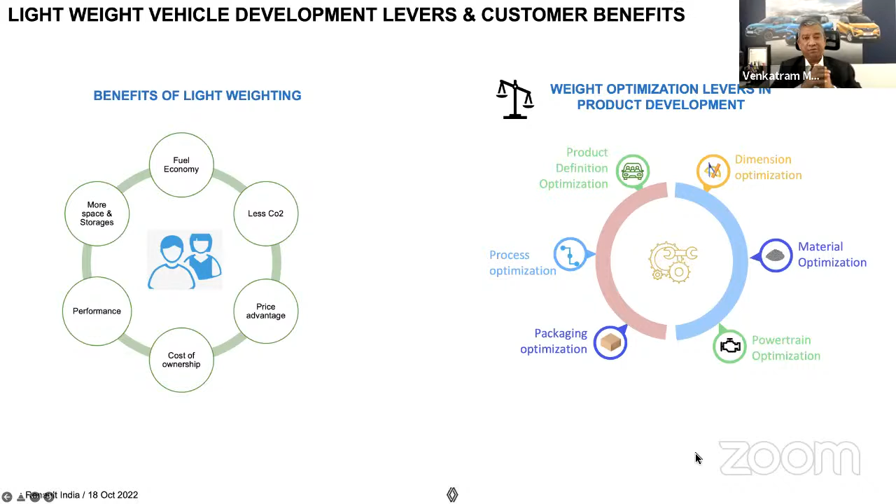I'm just talking about the Kwid as an example, being Renault. Kwid is our product, so I want to put some perspective to this.

Less weight for its size. At the time we launched the Kwid, if you look at the overall length of the car versus the weight across the market, Kwid was the best. This proves that less weight doesn't compromise on size — it definitely gets you size even with lesser weight. How we achieve this lesser weight is something we'll elaborate on further.

Fuel efficiency is very critical. In India, we know our fuel prices, the way they fluctuate and are always on the higher side. Lesser weight means smaller engines, better engine efficiency, and more fuel economy.

If you look at the competition, which we've narrated as C1, C2, C3 — I didn't want to put the names — with respect to them, the Kwid, being lightweight and having very high fuel efficiency, is shown in the second box on the right.

And more exterior volume with less weight. As we spoke about a few minutes back, less weight can give you more space because you don't occupy large spaces, and you can economize on the volume available in the car. That's the second point we're trying to establish.

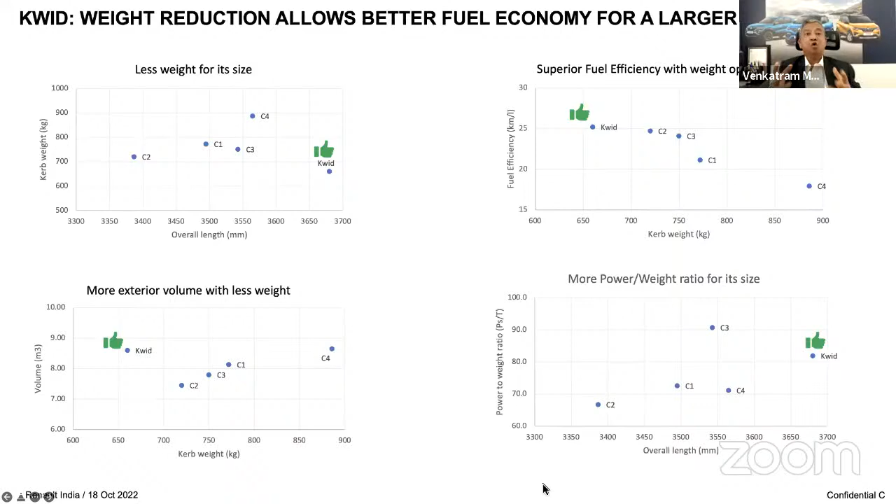These are a few examples which reflect a global trend. It's not specific to the Kwid, though it's being adapted in Renault globally. There's one good example from an older model we used to make.

We had the body upper structure at 134 kilos, and we got it down to 89 kilos using various types of steel. We started off with tailor welded blanks, using different thicknesses of metal, welding them, blanking and shaping them, then moving to advanced high tensile and ultra high tensile steels, which are now easily available in the marketplace. We also used aluminum sheets and magnesium material. For example, the twin steering wheel has magnesium inside, reducing weight and increasing efficiency, as well as cast aluminum, which is a trend most of us are using, followed by plastics. There are various types of plastics, whether fiber reinforced plastics, sheet molded compounds, or thermoplastics, also being used. So the change from 134 kilos to 89 kilos on the upper structure is a significant improvement, which adds to vehicle performance and drastically reduces loading on the engine.

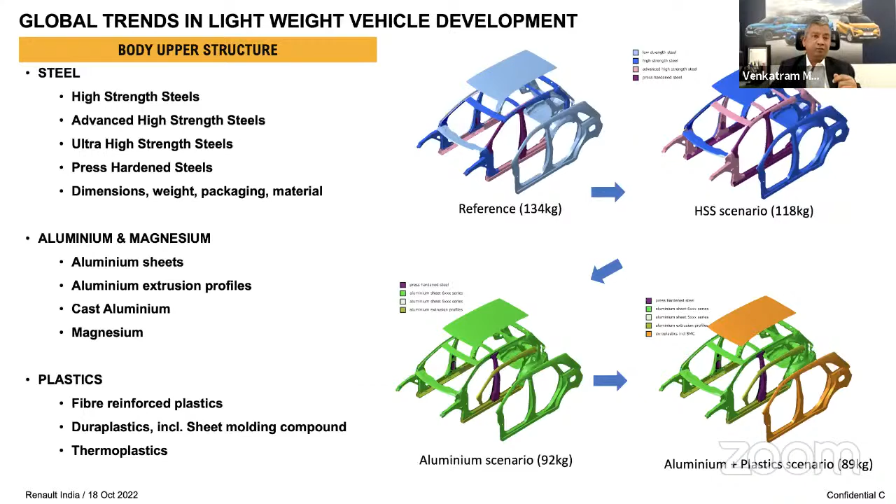Can we go to the next slide? This is the opening panels, on the side body outer as well as the doors. Similarly, from 111 kilos we went to 61 kilos, almost 50%. This is not that easy, because it has to take the side crashes, it has to have the safety, as well as reduce weight. These are the exercises we've done. Again, we're talking about steel, aluminum, plastics being added to it. In some cases, we also used perforated steel for making the side inners or body inners or door inners, so that we can reduce weight and still keep the strength of the metal as is. So these are a few examples.

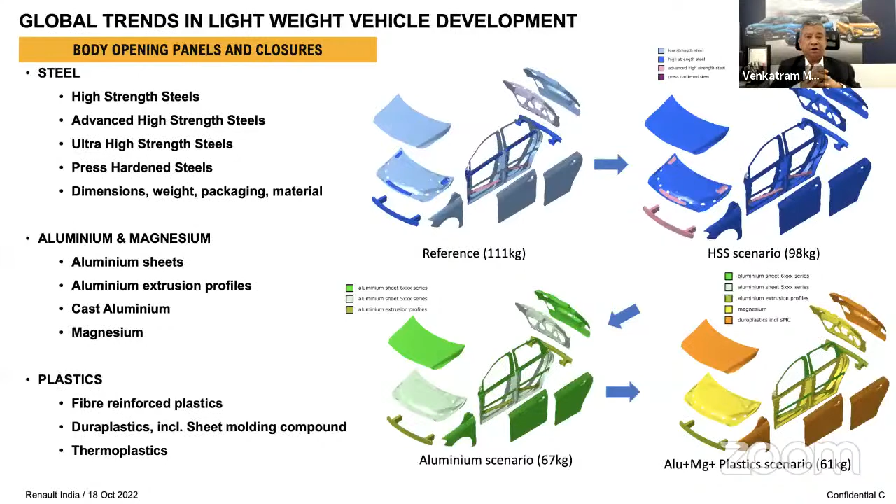As we move ahead, I'll also talk about the interiors. I'm not sure if you've read in many newspaper articles. Can we go to the next slide, please? People are using natural products, natural material, whether it's coir or banana leaves and so on and so forth. Here are some examples where we are also trying to do this on insulations. Especially on insulation, we are using cardboard, not the normal cardboard, or high absorbent polyurethane, as well as light non-woven carpets for the underfloor, which also helps us significantly with NVH. And the parcel shelf, which goes behind the seat, is also made using natural fabrics or natural material, and this is giving us significant results.

Definitely, we will have weight reduction. There is a little bit of cost associated with this, but overall we are trying to balance between weight and cost. Lightweight doesn't mean that it is expensive. This is one more paradigm which we all have to understand and shift from, that lightweight also gets us cost benefits. In the initial stages, when we were nascent in the automotive industry, lightweight was expensive because people were switching to aluminum. But now, as we progress, there's a lot of new material coming up which is very natural and not very expensive. It doesn't mean they are cheap, but they are cost competitive, in my opinion.

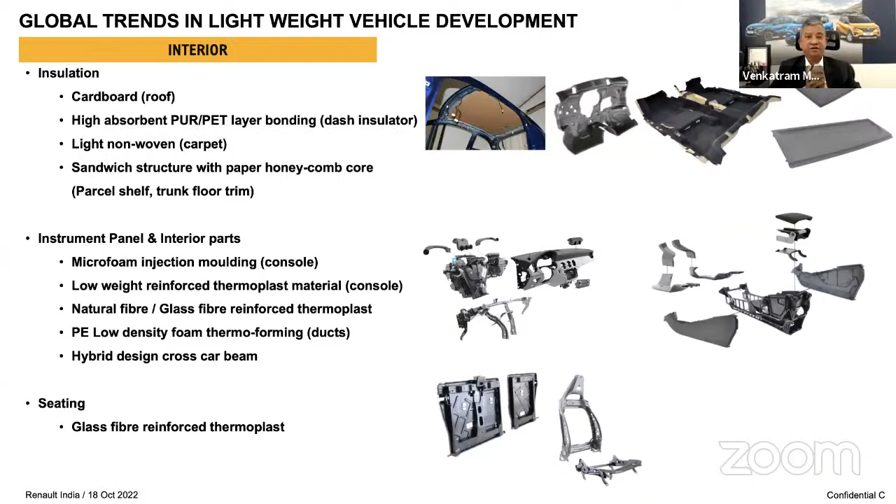So integral microfoaming injection molding versus conventional injection molding - these are the things we are trying to evaluate, to see how well we can balance the weight to cost ratio. This is a trend being followed across the automotive industry, and we will continue to do so. What is very important and critical is, it's not only about being green, pollution, and emissions, but it is also about safety.

So these new lightweighting materials, which we just spoke about, are also giving enough strength and increasing the safety of many of our cars. You can see there are 3-star rating, GNCAP, 5-star ratings - all of these can be achieved even with these lightweight materials as we progress further.

As Renault, globally, we are working in this direction along with our alliance partner, and we are moving this way. Even the new car generation which we are bringing into India will be using these lightweight materials.

And more especially, this is critical at this point of time as we are all moving towards EV. The battery is the most expensive commodity, and we want a long range of mileage to be traveled on the battery. The best solution for that is the lightweight material we should be using on the vehicles, which enables the battery loading to be reduced and gives us a long way to go. This is the second and foremost thing.

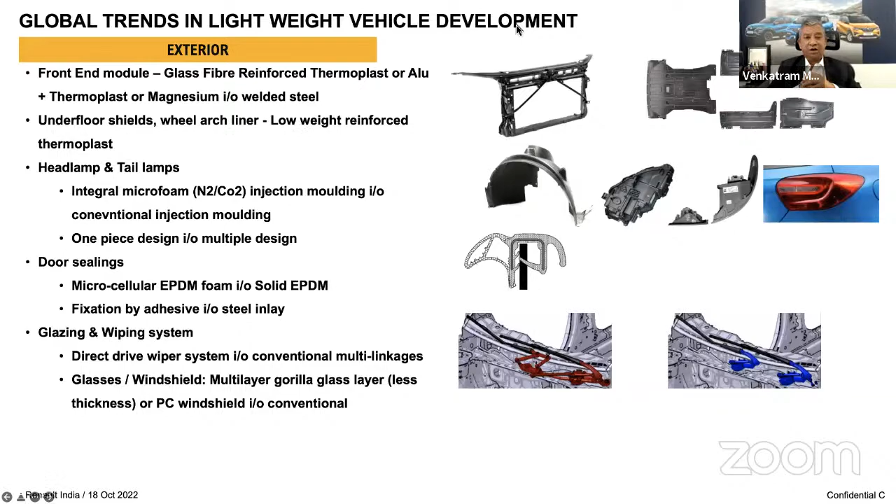Thank you very much, Mr. Mamillapalle, it's really very interesting. A couple of points I wanted to bring up - one key point: you raised the issue of lightweight materials not being so expensive. In the Indian context, how cost sensitive the Indian market is, especially at the lower end. Kwid is one example where you've really had to fight and work under a lot of cost constraints. Do you think it's still a challenge? Because while you said it's not that expensive, it's still not cheap. That was one question - does lightweighting still come at a cost, which in the Indian context can be a challenge? The second question is, to make it at scale, certain materials are very difficult to produce at a certain level of scale, which again limits their true potential.

Hormazd, it's all a matter of evolution, time, and volumes. If you see the lightweight material we had been talking about, once upon a time we were in a paradigm of using aluminum instead of steel, and aluminum was definitely expensive then. But using aluminum appropriately, where it needs to be used, and balancing the whole equation, makes a lot of sense. If you see one of the cars we have made - I can't give the example now because it's still not launched - we are using perforated aluminum sheets.

So you are reducing the weight. Aluminum is fully recyclable, so you still have the stiffness as well - you've not compromised. Exactly, you're not compromising on the stiffness, because it's all a matter of design - how you adapt and how you bring about the strength while still reducing the weight and optimizing the cost.

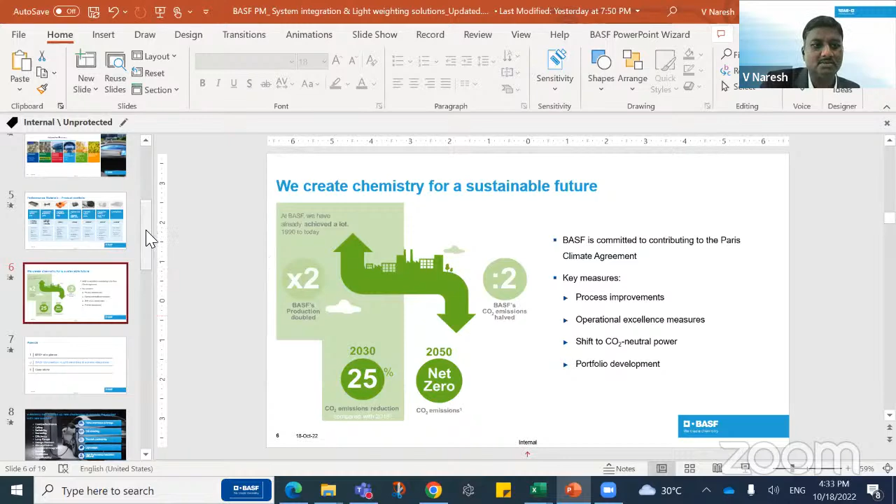The topic I will take you through in the next 15 to 20 minutes is lightweighting and system integration. Over the last few hours we've had intense discussion and insightful questions from the team on lightweighting in automotive. I will take you through some of the co-creation exercises BASF did across the globe on lightweighting, and when we talk about lightweighting, system integration comes along with it. We have had a successful journey developing products and applications in automotive in this area. So let me take you to the presentation.

So the agenda will flow as follows. I will give a small introduction on BASF, and then share some of the co-creation applications along with case studies on how BASF works with customers, OEMs, and tier ones to create innovations on the subject of lightweighting.

So, BASF introduction. At BASF, we create chemistry, and our chemistry is present in almost all industries. We are a market leader in the chemical industry, and we have a responsibility for economic success and environmental protection of the globe as well as our customers. As a company, we have about 78.6 billion euros in sales with an EBIT of 7.8 billion euros as of 2021, with more than 111,000 employees working across the globe.

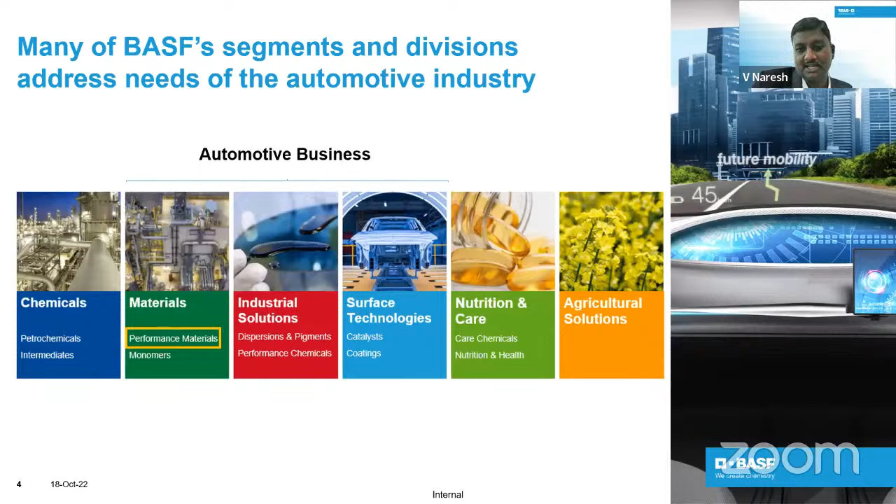So, performance materials — this is our material portfolio. We have polyurethane systems, currently widely used in automotive interiors, but with the shift towards EVs, there are many applications where we can support customers in battery thermal management, encapsulation, and lightweighting with polyurethane systems. We have benchmarks and success stories around that.

And we have thermoplastic polyurethanes, which are a very good soft-skin material with much higher durability compared to solutions like rubber.

And then it is also having a very good weatherability and resistance to oil, grease, and low temperature impact resistance.

And then we have PBT. Ultradur is our product range. PBT is widely used in electronic components, where dimensional stability is key, and it has a very good electrical performance and good dimensional stability along with low water absorption behavior.

And then polyamide and PPA, polyphthalamide, where we have a high temperature material which has been very good in terms of its mechanical behavior, along with chemical resistance. Polyamide has been known for its chemical resistance with contacts and a low tendency to creep, with outstanding chemical resistance along with good heat aging behaviors.

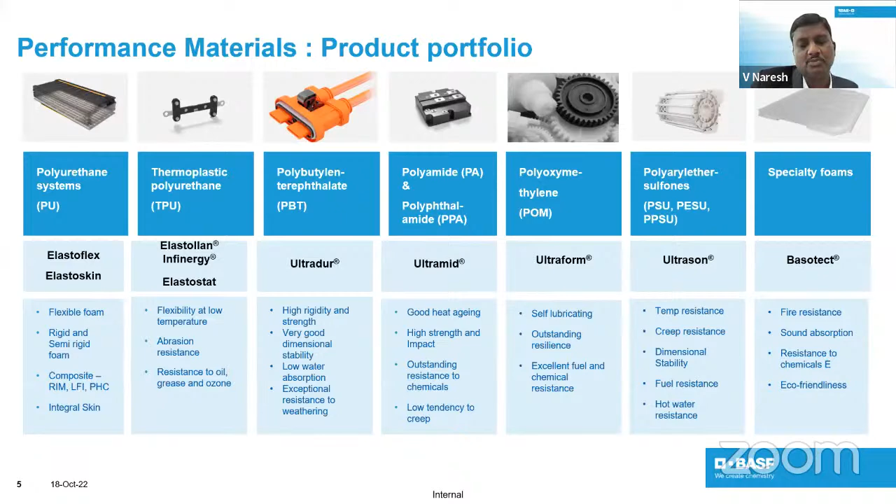So this is about the product portfolio of performance materials from BASF.

And finally, while introducing BASF, I have to touch on the part of sustainability. We create chemistry for a sustainable future. This is a slide where we probably say we have been working on the sustainability part for quite some time.

Compared to the 1990s and to 2020, over the last few decades, we have increased production rate to double what we used to have, and we reduced our CO2 emissions from the manufacturing of these products. So whereas we have increased production, we reduced our CO2 emissions, and we have stringent targets to work towards, like reducing further 25% by 2030 and reaching net zero by 2050 with the products.

So for this, we have been continuously working on process improvements and operational excellence, and shifting to CO2 neutral powers, and portfolio developments around bio-sourced materials, recycling, and chemical recycling. So there are a lot of activities going on around material development to achieve and deliver sustainable products to the customers.

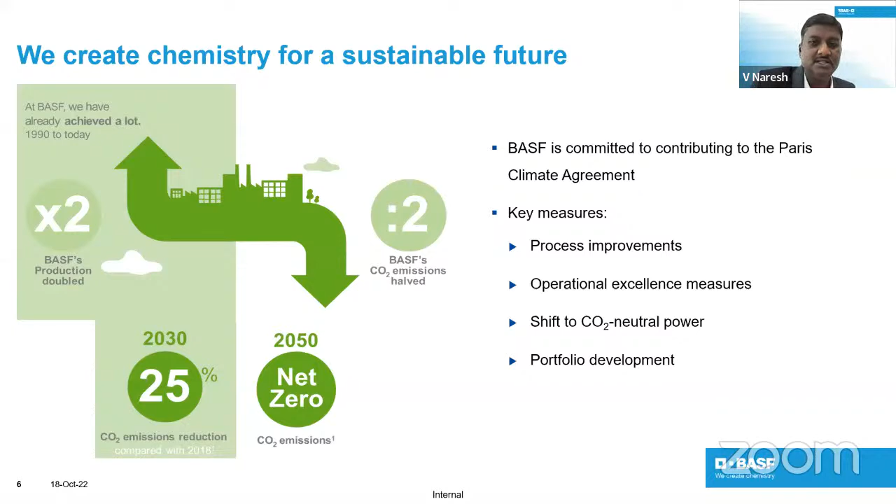So this is about the introduction of BASF, and now I will move into the session on co-creation activities, especially on lightweighting and system integration. I will introduce applications here to give a thought that this is possible, for the team here, so that we can think and take it to the next level. It's just to show these are already possible, and there is more to think and more to come.

Before getting into lightweighting, I'd like to share one of the key shifts happening from the material perspective, especially with e-mobility. The electric vehicle drive has opened up a lot of challenges and new requirements for new applications, and the market has been made with new products.

Especially with flame retardancy, traditional automotive applications were sufficient with FMVSS 302 standard flammability, but now the flammability requirement of most e-mobility applications has been taken to the next level, UL V0 5VA. So it keeps increasing and getting more stringent. Also, the orange color especially indicates high voltage applications, so it's becoming like the new black for e-mobility. This is the kind of new requirement we've heard from the market.

For us as a material manufacturer, this is one of the key things for us to think about and develop our material portfolio towards this direction. And then we also see requirements of EMI shielding in the BMS and surrounding applications and controller applications.

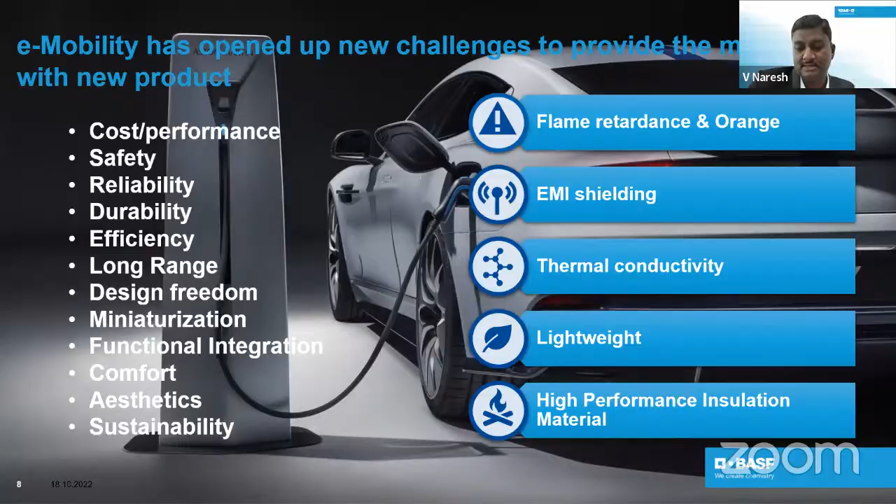So this is one application, the battery back cover, front cover, where traditionally it started with casting, then moved to the evolution of sheet metal, and later, with the push for lightweighting, moved from sheet metal to SMC. And recently we had success in converting SMC to PU composites.

With PU composites, we were able to optimize. We had design freedom to optimize the thickness from a traditional 2.53 mm to 1.52 mm thickness in the sheet, in the back cover application. Along with that, we were able to increase the fiber matrix up to 50% based on strength requirements, and localize the strength requirements with the composite matrix when using PU composites.

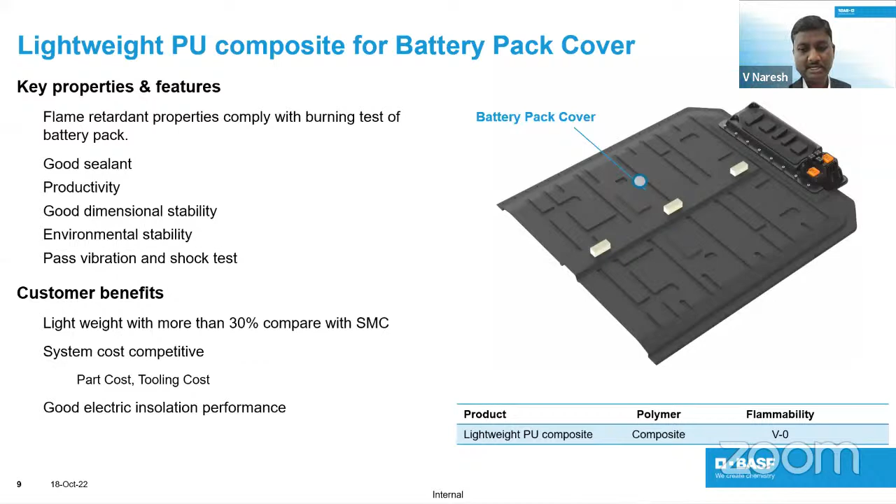This gives the customer an advantage of 30% lower weight compared to SMCs, while also meeting similar flame retardancy requirements. We developed a special composite with V0 flammability, which is a key requirement for this application. With the composites, dimensional stability is much better compared to SMCs, which helps good sealant performance, and productivity has increased compared to SMC technologies — it is more stable and meets all application requirements.

So, for example, this is one of the parts which we successfully got through for this application, tested and proven with tests like thermal shock, gas tightness especially on leakage, low temperature impact behavior, climatic cycling tests, burning tests, thermal ageing, deformation test, vibration test with complete battery loads, water leakage, burst pressure test, and most importantly thermal runaway behavior. All these tests were performed and passed.

And this happened because of collaboration with the OEM, the manufacturing processor, and the material manufacturers, when we all joined together and wanted to innovate and optimize from the existing level. That is where this application moved and went to success.

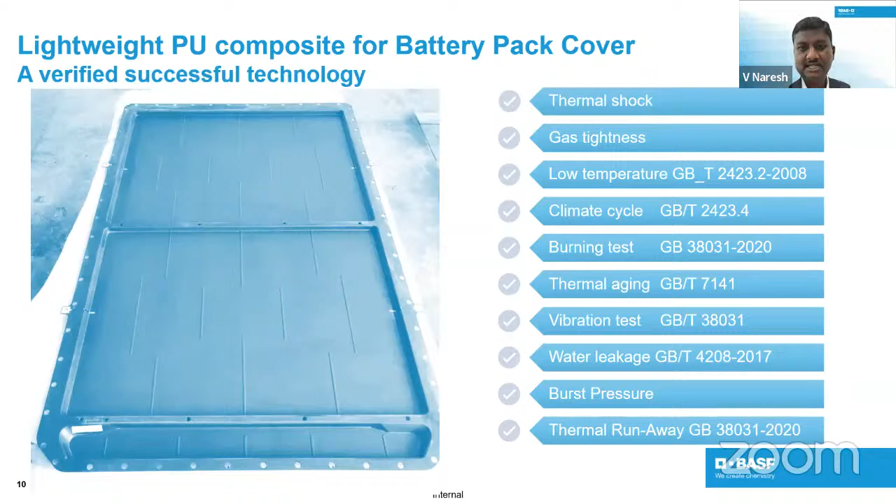I will take you to another example with the same fashion, in engineering plastics. Earlier this morning, Mr. Venkat also said seats are an area where currently we have more weight and need to optimize. The same discussion happened during the panel discussion with Mr. Tapan. So this is one area we need to work on.

So here we came up with a success for the backseat, rear backseat application, where we converted a frame of the backseat from sheet metal to plastic. Here the biggest challenge is cost — whenever the team comes up with this, they always point out that the cost of sheet metal compared to plastics is challenging. But today we were able to make it work, and we already have success around this.

And thanks to the new generation materials, which we developed as the CR series — crash relevant series — we have used polyamide 6 with 35% glass reinforcement, a new generation crash relevant advanced formulation material.

The advantage of this material is it's an ideal combination between strength and toughness, and this toughness helps the high impact behavior to absorb more energy in case of crash requirements, and it has good dimensional stability at low temperature with good creep strength.

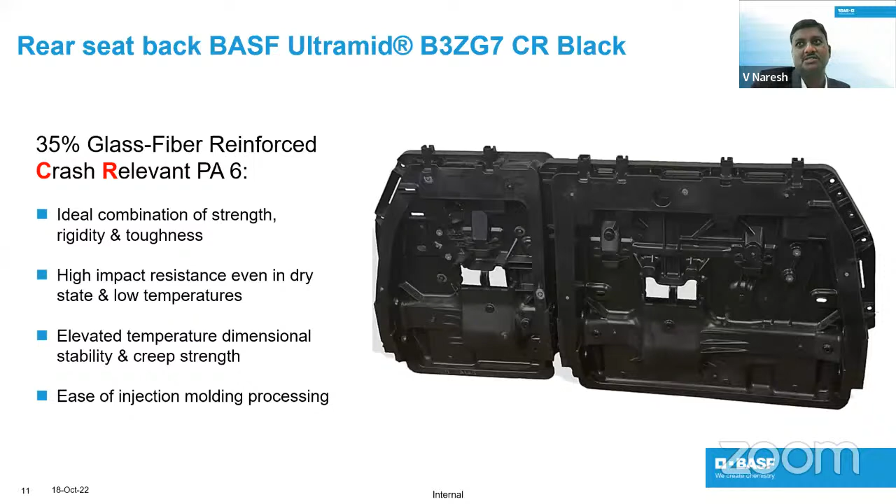And finally, this has been made out of an injection molding process, which is a mass manufacturing process, quite easy when it comes to processability.

So here is the outlook of how it is converted from metal to plastics, especially when it is a sheet metal, comparing to the plastic composites. There are 16 components in metal which have been converted into one shot plastic with a small metal insert, especially on the mounting locations. This is the area that optimizes the cost.

So we have to see it as an overall system, the cost of the overall product. We have been optimizing multiple processes into a single process and multiple tooling into a single tooling, which gives the customer the ability to absorb the cost impact coming from composites compared to traditional sheet metal.

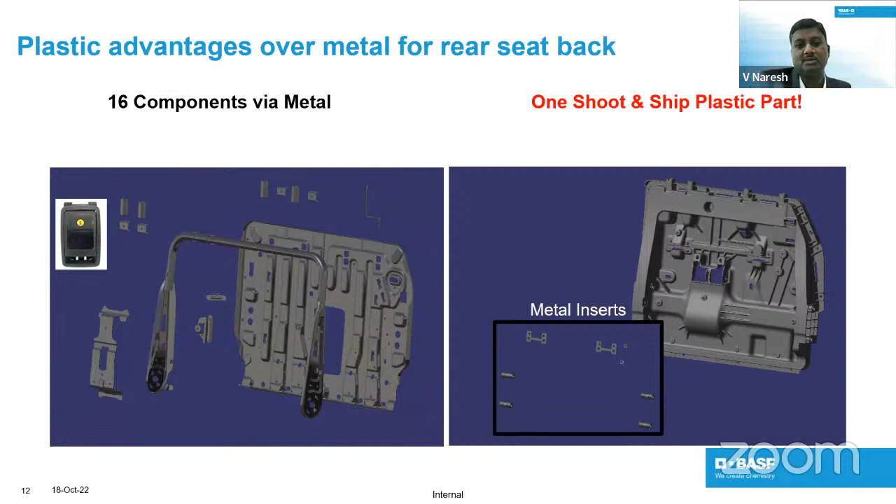So that's on the cost front, and in terms of weight reduction, it will reduce up to 30% of the weight from the traditional metal application when converting into plastics.

And this application has been a successful one, first of its kind in the industry with this kind of plastic standing seat backs. It is not relying on metal brackets; it's fully plastic, and it meets all the crash requirements.

It has passed all the FEA requirements when we supported during development, and it has also been physically made and tested, and passed through the requirements.

Thanks to the new generation and new developments happening on the material front, we were able to develop this new crash-relevant series of materials, which absorb more energy along with good stiffness and strength.

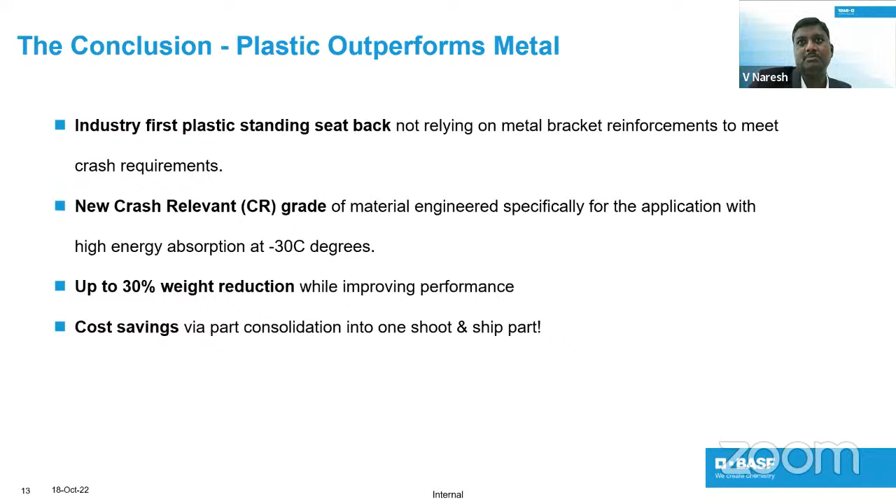So these are co-creation applications to show the team this is possible, and we can work together to do things differently, better with lightweighting, with plastics and composites, and how we work together. That's the area where I came up with this case study, especially when we discuss new ideas and innovations.

So we need the team to collaborate. Being a material manufacturer, we know materials and how we can work and identify applications along with the tier ones and OEMs.

This is the area of how a typical metal-to-plastic or lightweighting application development happens. The starting point is the idea or concept, which we work together to identify, and from there we define the design space, the surroundings of the particular part or objective we have, and how we can integrate the best possible solution.

We have to clearly define the objectives and boundary conditions, which is key when converting metal to plastics. What are the key requirements of the application that need to be taken care of when converting from X to Y. That definition is a key part we have to arrive at after we come up with the idea or concept.

From there, we go to the next step: selection of manufacturing process, how we are going to manufacture this, and what kind of material needs to be used based on the manufacturing process and application need.

With this, we redesign the part according to the manufacturing process and the material to be used, because metal cannot be converted into plastic as-is. We need metal processing and plastic processing to be different, so we need to optimize the design of the part based on the manufacturing process as well.

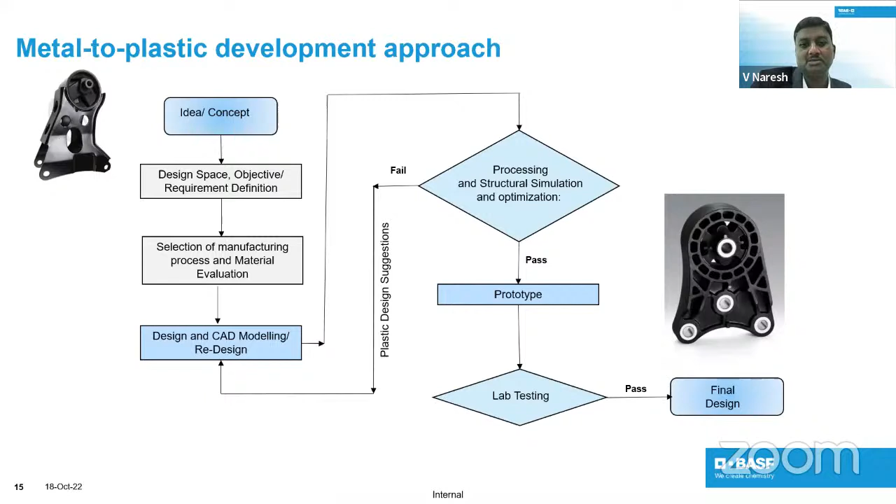So we could support customers in validating parts in those kinds of tests related to plastics. Once we prove these testings are related to the DVPs, we go for final freezing of the design and getting into mass production. So this is a typical cycle where we closely work with customers on the metal to plastic approach, and these are the areas where BASF comes in and supports customers in this kind of development approach.

We start working with OEMs and tier ones from the concept phase, and we start supporting and interacting with our customers on the design concept, especially when it converts from metal to plastics. We support our customers on plastic design requirements and how to change part structures to achieve the similar level of stiffness we get from metals. So this is an area we start working on from the concept phase.

When it comes to the design phase, we closely work with customers on selecting materials and specification requirements from the application point of view. In the proto phase, we do structural simulations and process simulations based on the customer design, to prove that the design we are developing will meet all the requirements.

After the proto development, we support the customer on part validations related to the particular application, part tests related to plastics. Finally, during production, we again support the customer on process optimization and closely work on closing the loop, ensuring a smooth transformation from proto to mass production. So these are the areas where we closely work with customers in co-creation and innovation projects.

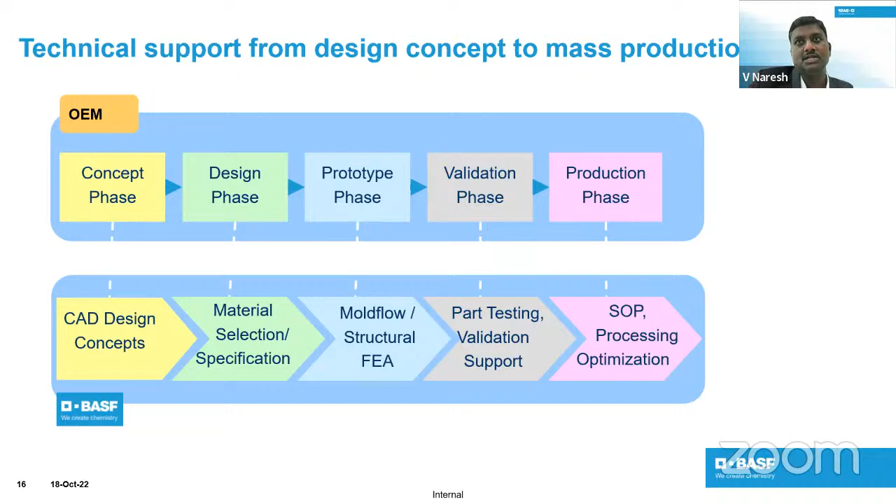One of the case studies we have done with customers is the motor mount, the electric vehicle motor mount. This is inspired by IC engine mounts. BASF is pretty strong in such applications when it comes to chassis or metal replacements. We already have good success stories in IC engines with engine mounts. So when e-vehicles came in, we wanted to take this aspiration to convert the motor mounts also into plastics.

With that we could make the e-motor mounts in plastics. It starts with the design space, then we optimize the design, and after finally arriving at the plastic design, we do the process simulations, capture the process variations, and do the structural simulations accommodating those process variations. This is one of the key strengths of BASF.

When CAE comes in, especially for plastics, we need to capture the process variations and process outcomes when doing structural simulations, especially the fiber orientation and weld lines. All these factors have to be taken care of while doing structural simulations to identify a real-time failure criteria. We do this with our Ultrasim, which we call a more integrative simulation approach, where we do process simulation, capture the fiber orientation, apply the mechanicals, and then perform the structural simulation to get the correlation very close to real-time results from the simulation activities.

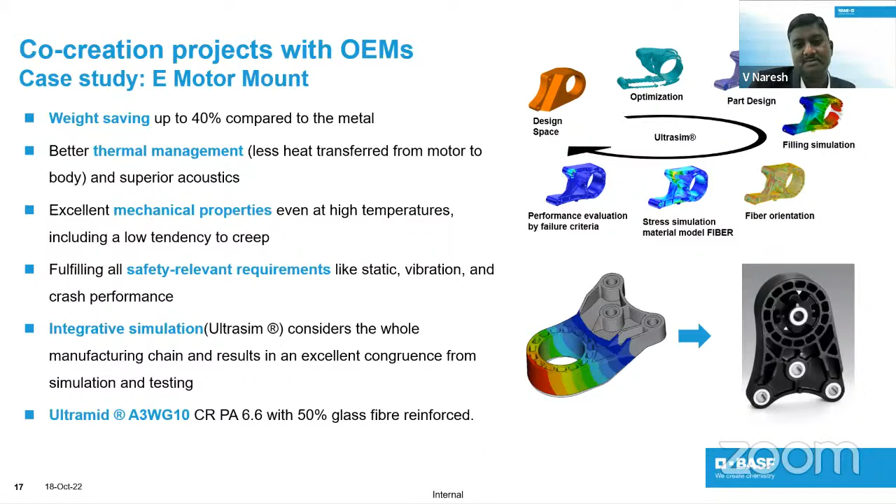So with that, I come to my last slide. BASF is not only a material manufacturer or material supplier, we want to closely associate with our customers as partners in innovation. To do so, we have our own processing center for polyurethanes, and an experimental part validation lab, which supports customers on part validation related to plastic behaviors.

Our material consulting is mostly through the creation center, where we have brought all the BASF products under one roof. There are designers and engineers working here, and we collaboratively work with OEMs and tiers in this creation center to identify applications and also identify their unmet needs and how to solve those with our material portfolio, or by developing new materials based on customer unmet needs. This activity is happening in our creation center in our Mumbai, India headquarters.

We also support customers in various processing technologies for engineering plastics, including processing and joining technologies. And we have in-house simulation competencies where experts work on design validation and design concepts, closely working with OEMs and tiers on developing parts in plastics.

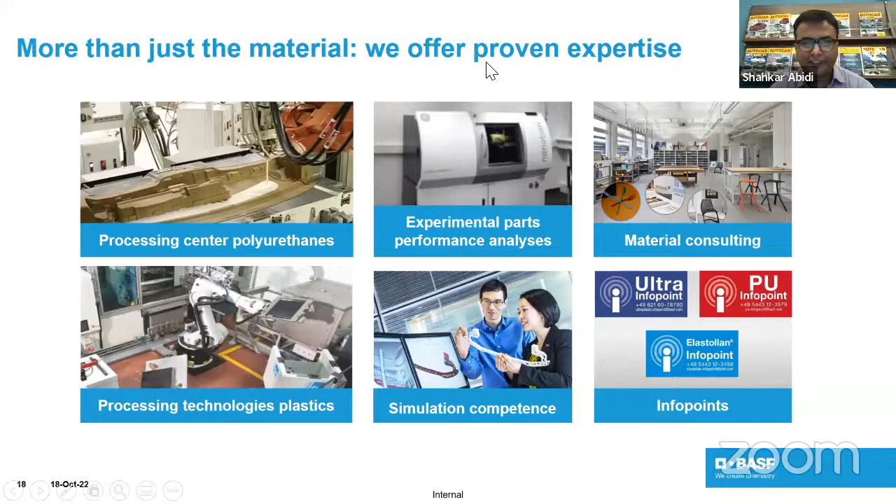The first question is, how is EMI or EMF shielding done in the PU composite battery cover? If you can provide some elaborate details, that would be nice. EMI shielding, right? So here PU composites is more of insulation with the existing formulations, but we could develop EMI shielding as well. Most of the time, EMI shielding is mostly required around applications like controllers and BMS, where it's addressed by engineering plastics rather than PU composites.

Okay, and if you can throw some more light on your R&D activities here in India - you said it's located in Mumbai - what kind of staff strength or what kind of research is being done, especially on lightweighting and especially concerning Indian OEMs in mind.

We have a creation center in India, where we have people working from design concepts - engineers working on material, engineers working on mechanics, and also doctorates working on chemicals. So here it is more of an input center, where we collect inputs from customers, and most of our R&D is happening either in China or Korea for material development. But the creation center helps us bring those connections with these R&D centers.

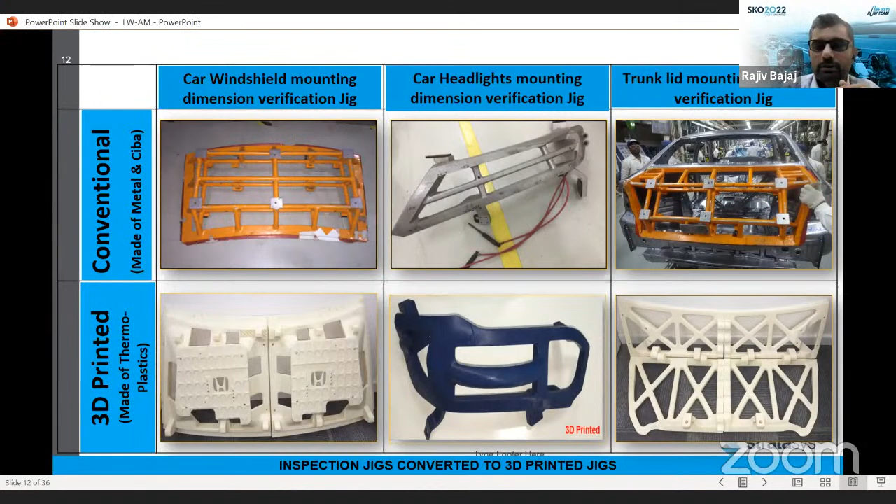They are much different. The designers and our team applied design for additive manufacturing. They made it ergonomic and did part consolidation, so multiple parts were reduced to a much lesser number. The beauty was they generated these parts right from the design phase, using CAD models to come up with this solution, giving them a 60 to 75% reduction in weight, plus improved usage on the shop floor.

It also improved employee health and safety, which is a big concern—metal parts with sharp edges and corners can damage employees' health and cause injury. There's a reduction in cost, adherence to takt time, and much more accurate parts because they are not waiting for some approximation from a metal forming process. We use the CAD data to derive the model, design it intuitively using software, optimize it, and then use it on the shop floor. These are as good and as sturdy as the conventionally manufactured parts.

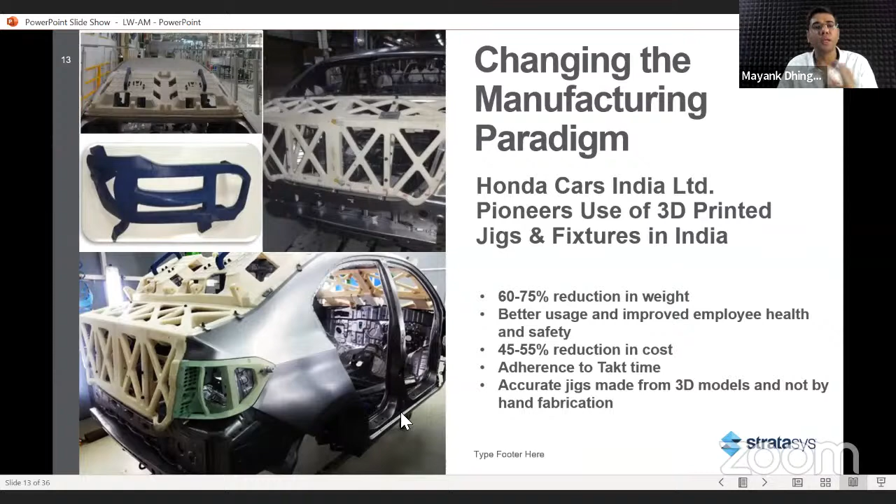Right, and also in terms of the process, Rajiv, you were also mentioning some of the interior parts which have switched to using additive manufacturing now. Can we have any of those examples as well? Is it possible for you to give us a visual representation?

So for interior parts, Mayank, by nature of the industry we're in, we're involved in a lot of futuristic projects. Customers are not that forthcoming in sharing the products unless they are launched. But in a multitude of cases, we are working on EV parts, electric mobility, and commercial drones, where parts are being churned out using additive, and in many cases we have completely eliminated the need for traditional manufacturing processes in this format.

And also, since additive is a very niche technology, when we talk about the premium car segment, are OEMs leveraging this technology for personalization of vehicles? Does it make more sense to use additive to offer both personalization and lightweighting benefits, and save on costs, since this is meant for low volume production? Correct, at this point in time, yes.

And of course, as the technology progresses and more machines and material options become available, it will move to a larger scale of production. But coming back to personalization, one of the key trends we see in the automotive industry is hyper-personalization—from getting one new model every 4 to 5 years with one facelift, to one new model every 6 months to a year being the norm these days.